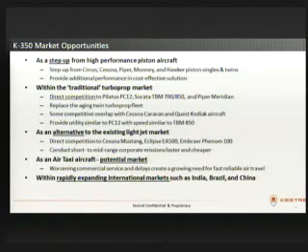And then there's an air taxi market that we call a potential market because so far it hasn't evolved. It's still evolving. We don't have any of those airplanes in our business case, but when that market evolves, we'll be very strong in that market, we believe. And then there's a rapidly expanding international market, especially Brazil right now is a leader in that, but India and China are emerging. There'll be a lot of airplanes of this category to sell. Today I'm going to focus on the traditional turboprop market and the light jet market. So I'll show you a little bit about those kinds of airplanes.

There's 6 main ones here that we look at. The PC-12 in the top left corner, the TBM 850, those are our 2 closest competitors. The Meridian is one that Alan Klopmeyer flies today. That's a little bit further away from us. And then a representative of the aging twin fleet in the bottom left is the King Air C-90. And then 2 light jets are the Mustang and the Phenom. And what I have here are the prices of each of those. So they go from $4.6 million for the PC-12, the highest priced one, and the lowest priced one there is $2.2 million in the Meridian.

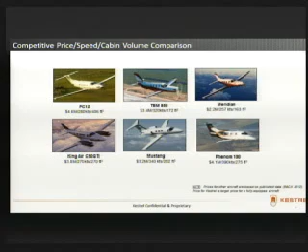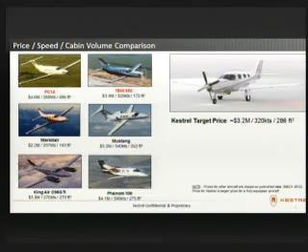They vary in speed. The closest one for us in all of these is that top middle one, the TBM 850, 3.4 million, 320 knots. And the last number is the cabin volume. So you can see the PC-12 is quite large. So our goal is to have our aircraft priced around $3.2 million. It's 320 knots, so it's the fastest of the single-engine turboprops, same speed as the TBM 850, but our secret is we're going to beat them by a little bit, and we're going to be priced less than them. And our cabin volume is quite a bit larger than the TBM 850. So we're very comfortable with our niche, but these airplanes here are the ones that defined what we're going after.

So here's a real quick overview of what the airplane is. It's primarily made out of carbon fiber composite, very large windscreen, very large cabin windows for good visibility, and I'll show you more on that later. A differentiator here that we have in the engine is the Honeywell TPE331 engine. It's a direct drive, 1,000 horsepower. It's actually 1,650 horsepower, but we derate it, so we have plenty of margin to grow that if we need any more performance.

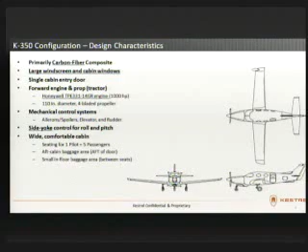Mechanical control system, that just means conventional controls, except it does have a side yoke. If you've ever seen a Cirrus where the yoke is off to the side, single grip, very similar to that. Very wide, comfortable cabin, seats 1 pilot and 5 passengers for a standard configuration, but we do have some options for that, and I'll show that later too.

Integrated avionics system, very state-of-the-art there. Tricycle landing gear, that just means 2 main gears and a forward nose landing gear. Anti-icing system for FIKI. FIKI is flight into known ice. And we're unique here, and we use a system called EMEDS. It's electromechanical expulsive de-ice system. So it kind of bangs the ice off the leading edges.

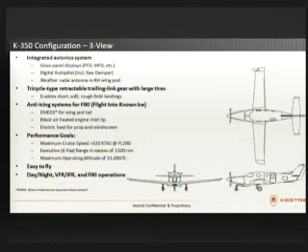Performance goals, as I said earlier, 320 knots at flight level 280. Our airplane will actually go to 31,000 feet. As you climb higher, turboprops lose a little power, so the maximum speed is at a little bit lower altitude, but you get maximum range at higher altitude because of less drag. But we'll go, this says 1,200 nautical miles. That's actually 1,300 nautical miles is our goal. Easy to fly. It'll be day-night VFR, IFR, so very, very capable airplane.

So I want to talk a little bit about our most valuable resource. That's our people. We have a very experienced staff of engineers, designers, and technicians. Advanced degrees in all disciplines, from PhDs to BSs, but also aerospace welding certificates, and technicians are very experienced in composite construction.

These 2 designees here, the FAA DER and DAR, the DERs are engineering representatives, so they can sign off for FAA certification requirements. The DARs can sign off for FAA build requirements. And we have both of those in-house. We have 4 DERs and 3 DARs. We have a very strong relationship with the FAA. Many of our staff, in the Superior staff, probably 60% came from Cirrus. So many of us, myself included, have several certification projects under our belt.

These graphs here show the experience level. In the bottom right corner, show 30% of our engineers have over 20 years of experience, and 26% have 5 years or less. My goal as a COO is to have 25% new grads or new hires, these 5 or less, and 25% 20 years or more. So we bound both ends of that, and we're pretty close on that.

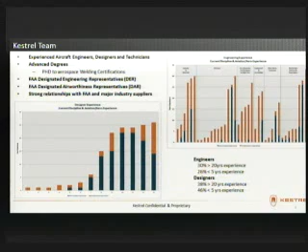On designers, you can see that graph on the left. We've got very experienced people and we've got inexperienced people, but 38% are more than 20 years. So that's plenty of experience in both of those disciplines. A designer, by the way, typically operates our CAD, and I'll show you some of our CAD, our computer-aided design systems.

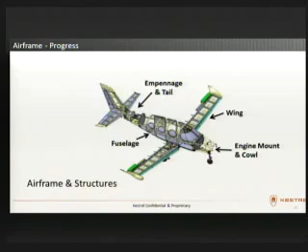So I'm going to go through the design process. There's a lot of slides, so I'll go very fast here. But airframe and structure, when we talk about airframe, this is the composite, the carbon fiber part. So there's the fuselage, the empennage and tail, the wing, and it doesn't show there, but the cowl. This diagram right here doesn't have the skins on, just so you can see the skeletal structure of the airplane.

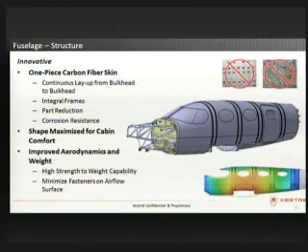Any composite material like fiberglass or carbon fiber allows you to shape with much more control than you get with metal. So many people are going with it, like the Cirrus is a fiberglass airplane, and the Cirrus Jet's carbon fiber. We're carbon fiber also, and it also helps you improve aerodynamics because you can control the shape totally for reduced aerodynamic drag.

Here's kind of where we're at. These coupons on the left, we tried very many iterations. Those pictures on the left side are of the frame structure. When we pressurize this airplane, it's like a balloon always trying to blow up. So we have to maintain that at 31,000 feet with an 8,000 foot cabin altitude. There's a lot of pressure trying to blow up this airplane. So these frames are designed to hold that structure.

And we're in development now. We have 3 phases. We're in the second phase. Those center 2 pictures, the top one is a picture of a fuselage section that we've made, and that bottom octagonal looking thing is a tool to be able to lay up that. So we've done some tests to make sure that we can lay up carbon fiber material in that single piece fuselage, and I don't know what just happened there.

Computer's rebooting. So I think it's configuring Windows. Should I hook up my computer, or would it be better to do this? Pardon me? You said to hook up your computer? I have my computer here, if it would be easier to do that. Yeah, we won't shut it down.

I can just unplug this. Okay. All right. You think you know what you're doing? Oh, yours is starting to boot though, isn't it? Yeah, so wait, yours will be just as fast as mine.

Okay, let's see. While that's rebooting, this is the handout that we gave to the FAA. So all of these slides, 300 plus slides, we did 4 months ago. And while I was putting this presentation together, I was looking at this and I realized how old some of this is. So our progress is real time with this many engineers. We've got about 40 engineers and 20 some designers. It's real time. Every time I turn around, there's new designs going on.

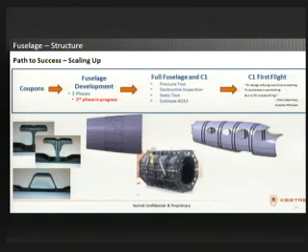Sorry about that. So I was saying that we're in that second phase of doing that fuselage development. And then the next phase is actually making the full-scale tool, which would end up with that single-piece fuselage, and then that'd be followed by first flight. That quote's a little hard to read, but it says, to design a flying machine is nothing, to build one is something, but to fly it is everything. That's a pretty famous quote in our industry, and all those are very, very true. It just keeps getting more and more difficult.

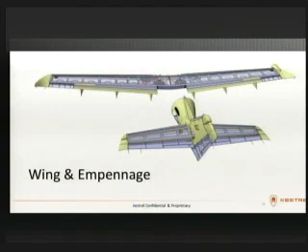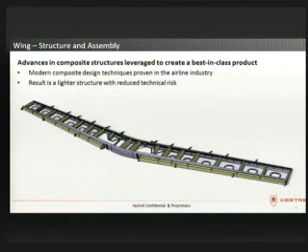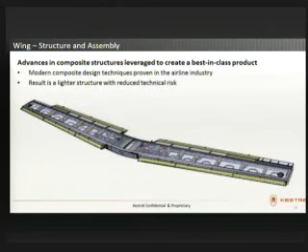So the wing and empennage. This is the wing, that first piece that's in the front there, that's the main spar. About 40 feet long, that's the single most important part in the airplane, very strong. And it's just populating the skeletal structure. This is showing some of the design we have. That stuff that's going on the front is the electromechanical expulsive device for the de-ice. On the back are the flaps, the ailerons, the control surfaces. The wingtips were the last things that came up.

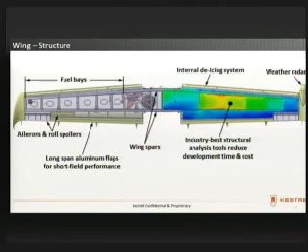On the right side, what it's showing is just a simple analysis, in this case, a load analysis. So since we know the weight of the airplane and a lot about the aerodynamics, we can put load on the wing to show what kind of stresses will be put on these. That's a very simple depiction of many iterations of that kind of thing to make sure we're building it strong enough.

The empennage, the back of the airplane, both the vertical and horizontal tail. This little movie going on there is showing how some of the pieces that go into it as it's built. The colored photographs, again, the one with the tail section is what's called a deflection diagram. So we hold it tight in the front side where the two little holes are, and then put the loads on it, and it shows how much the airplane will move, so that we can tell binding and things like that. The little wing section is loaded up to show the lift effect on the horizontal.

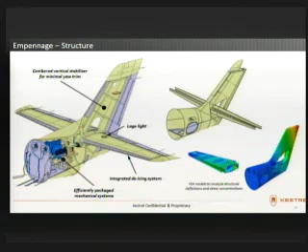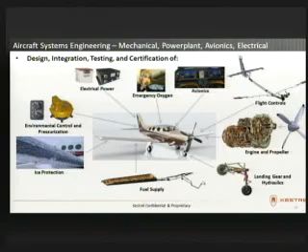These are all the different systems in there. I'm going to just pick a few of these to go through to talk to you about. But every one of those different things, start in the top middle and go around clockwise: emergency oxygen, avionics, flight controls, engine and propeller, landing gear and hydraulics, fuel system, ice protection, environmental control and pressurization, electrical power. We have engineers and designers and technicians working on all of those systems, and we have very good progress on those. So I'll show just a few of these.

The engine is probably our most critical one. This isn't showing up very well, but again, I said it's 1,000 horsepower. But a critical thing here is that time before overhaul is 5,000 hours. The closest competitor engine is 3,600 hours. So that's a huge total cost of ownership positive for our customers.

The single shaft design, that means it's direct drive from the turbine engine to the propeller. So when you put power in, it's just like a piston. It gives you immediate power. A typical turboprop goes through a pneumatic stage. When you put power in, it can be a 3 or 4 second delay.

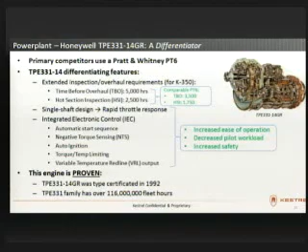So anyway, this is a big differentiator. We're very excited about this engine. This engine's proven. In this exact configuration, it's in a lot of commuter airplanes. So it's got over 116 million fleet hours in the field. We've worked very closely with Honeywell to design a test set where we designed the engine mount and the inlet, the propeller. We worked with the Hartzell company to do the propeller. But together we put that all together and ran it in a place called Santan out by Phoenix at a Honeywell location. And so in the top right corner, that's the engine running.

And then in August, we're going to go back out with a complete system with the cowl on and the exhaust on and finish that test. And that'll just verify all of what we call our firewall forward or power plant design.

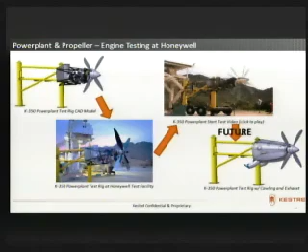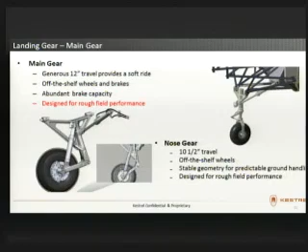The landing gear, another very critical system. It's a trailing link, and that action you see right there is what trailing link does. Makes a very soft ride when you're landing, but it's really good for rough field performance. The other real big differentiator here, the main landing gear tires are 24 inches, so they're very, very large, and that'll allow a very high flotation. So for grass strips, short runways, we'll be able to get in and out of a 2,400-foot runway, which in this class is unprecedented.

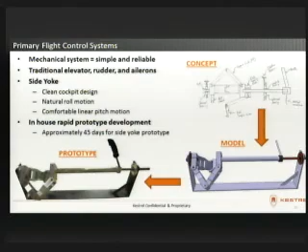Flight controls. You can't see it, but up in the top corner there's a sketch of an engineer who said, here's what I want to do, and then he created a CAD model, and within 45 days from the sketch to the time, on the left was a prototype that was built, and it gives you the direct feedback. This little clip shows you some of the tools that we can use.

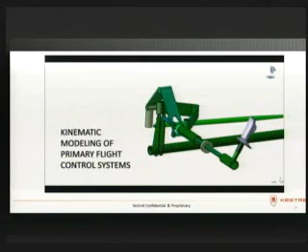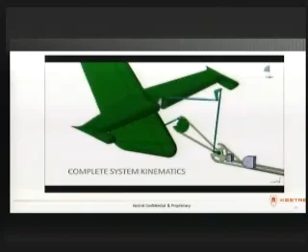So this is that piece that you just saw, and it gives you the input for pitch and roll. And this tool is a CAD tool called Kinematics to show you how all the pieces hook together. It'll show system collisions. You can put the loads in there so you know how strong to make these parts. All the arcs that you need to swing, that can all be done inside of our CAD model, and this is an actual CAD model of our system.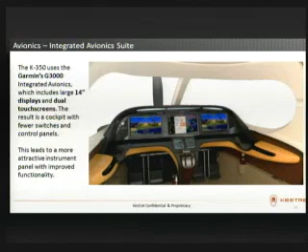Avionics is an integrated system. We haven't announced this publicly yet, so if there's anybody videotaping, this can't be said outside of this room. We're announcing it at Oshkosh, so Garmin 3000. There's 2 screens with a third screen option, and 2 other screens for input devices. So right here is the input device. It's a touch screen.

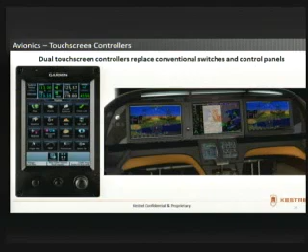Just like your smartphone, you touch it and change it. It doesn't call up a new app, but it calls up all the different functions. The main screens have what's called synthetic vision, and you see the mountains there. If you're flying in VFR conditions, you look at the screen, you look out. What you see out the window is what you see on the screen. If you're in the clouds, you see this.

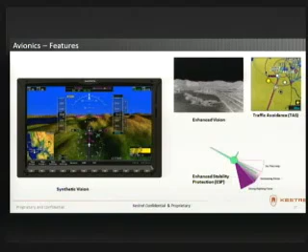Up next to it is what's called enhanced vision. That's for night vision, so you can see the ground at night. We have traffic avoidance systems. The augmentation for the autopilot down the bottom, that's enhanced stability. The purple thing says if you get into a real steep bank, if you're hand flying it, the autopilot will actually push against you, telling you you're getting a little too steep here. It doesn't take over, but it pushes against you.

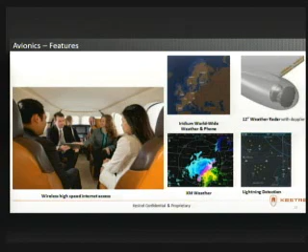In the aircraft, wireless high-speed internet access, Iridium worldwide phone and weather, XM weather, NEXRAD weather in the airplane, data links from the ground, lightning, and up in the right corner is a standard onboard active weather. You can't see the pictures here, but we have a

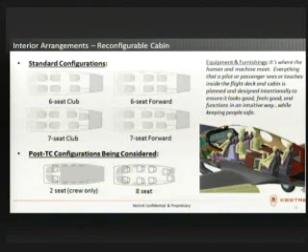6-seat in the bottom right. That color picture is our standard configuration with that club seating, so the 4 people in the back are sitting facing each other, and the 2 pilots up front. But we have a 7-seat, and we'll be working on, after the initial certification, an 8-seat also.

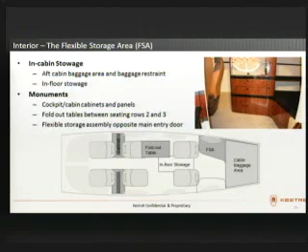Stowage: in the back behind the seats, there's a flexible storage area where all those pieces can be taken out individually, so you can be very, very flexible on what kind of things you can stow. If you take it all out, you can put a couple mountain bikes back there. You could put 6 sets of golf clubs in there, skis, snowboards, things like that.

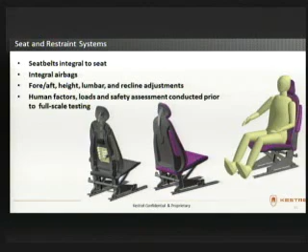The seats, a lot of work on the seats, because the seats, like in a car, have to hold the person, keep them safe. The seat belt, we have airbags in the airplane, just like in an automobile.

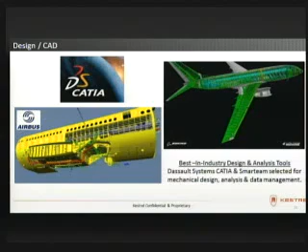So design CAD. The CAD system we use is called CATIA. It's the best in the industry. Both Boeing and Airbus use it, and they have been using this for more than 20 years. We're able to leverage a lot of knowledge that they've already helped develop. There's a little video showing some of the details in our current design.

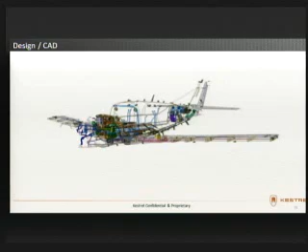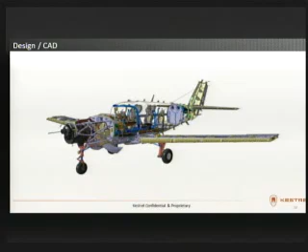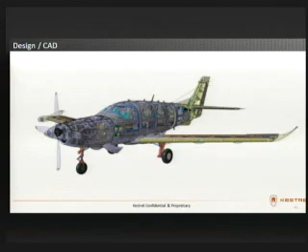So these are wiring and flexible hoses, fuel lines, and now the air conditioning and heating systems are showing up. The landing gear, the wing is getting a little bit more populated here. The structure's starting to come into place. The engine just popped in there. Now the seats are coming in, the people are coming in, the frame's coming on, propeller, and the skins will come on here at the end. So this is how much detail we've got in our CAD right now. So it's very far along. And this shows 2,500 components are currently modeled in our CAD.

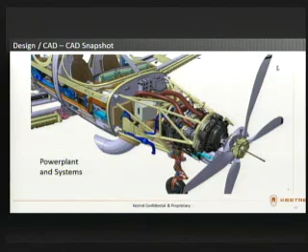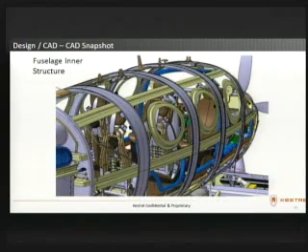This is a quick, more detailed look at the power plant. You can see a lot of detail in there. The battery, the power generation system, alternators, starters, all those are in there. Underside the structure, you can see the floor structure, the exhaust pipes, the landing gear, very detailed. And this shows, without the skin on, the structure to hold, under pressure, the fuselage loads.

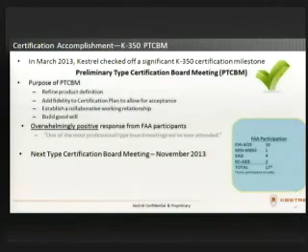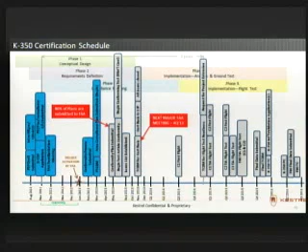So certification, I talked about this meeting. This was a very important meeting. The bottom bullet, our next type board meeting with the FAA is in November, and that's on schedule. These two red things: we have to submit what we call area compliance plans, how we're going to comply with all the regulations. 80% of those plans are submitted to the FAA, and of those plans, 75% are approved by the FAA. So our next major FAA meeting, as I said, is in November. All those plans will be done and approved by that time, and we're well on plan there.

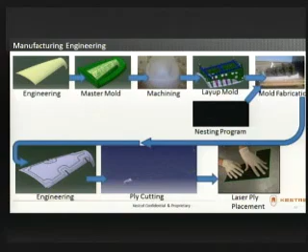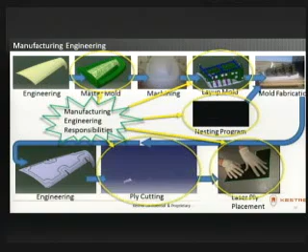So we've done all that testing to be able to do that kind of work. The manufacturing engineer's responsibilities are all those circles. So we've got manufacturing engineers on board, I think about six of them right now. This is an actual tool that was made, so the machining, and then the middle part where it's green is being laid up to make the tool, and then after the tool's made, the black is the carbon fiber tool upside down.

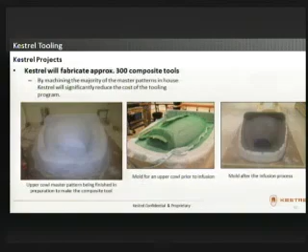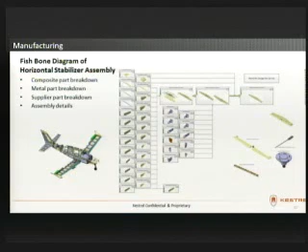Every major piece. So in this case, it's a fishbone diagram, we call it, of the horizontal, that back tail section, just the horizontal section. All these pieces, every one of those is a tool that has to be made and a part that has to be made. They all come together to form the horizontal. For this airplane, we're going to be designing and building about 250 to 280 composite tools. This is just one example.

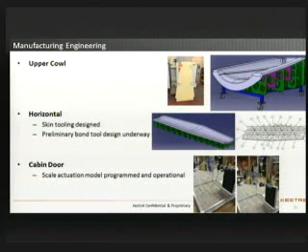And here's a couple others. The top one is the cowl. The middle one is the horizontal, both the surface of one of the skins and then the structure behind it. And the bottom is a little hard to see, but it's a 1/3 scale door, and we've got it so you push a button and the door closes and opens, and we're modeling all that and checking the loads on all that. And these are some other tests that are happening.

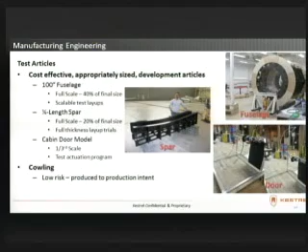The 100-inch fuselage I mentioned earlier. We're going through a series of tests on the spar, the main spar of the wing. That says full scale, but it should say quarter length spar, it's full scale size but quarter length, and the cabin door model.

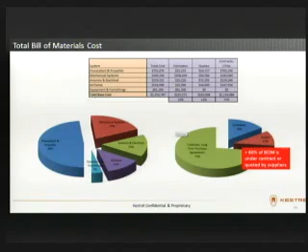Program management, one of the biggest things here is making sure we know what our bill of materials is. In that bottom right corner, you see 80% of the bill of materials is under contract or quoted by suppliers. So we've got either contracts or firm quotes from our suppliers for the majority of our design. These are some of our suppliers: Honeywell, Hartzell, Triumph, Garmin. They're all very, very big in the industry. Parker, Goodyear. Pretty standard in our industry. We've got more than $11 million worth of either absorbed hardware, where they're giving us free hardware for our early airplanes, for our certification airplanes, or engineering design support that they're providing, and they've committed to that number.

I want to go back to jobs. The thing about jobs that I didn't mention before was today, of that 55 or 60 people in Superior, that's a $4.8 million annual payroll with an average salary around $80,000. In Duluth, we still have 6 people over there. We left our heavy machinery over there, so there's some technicians over there. And in Brunswick, we have 44 people.